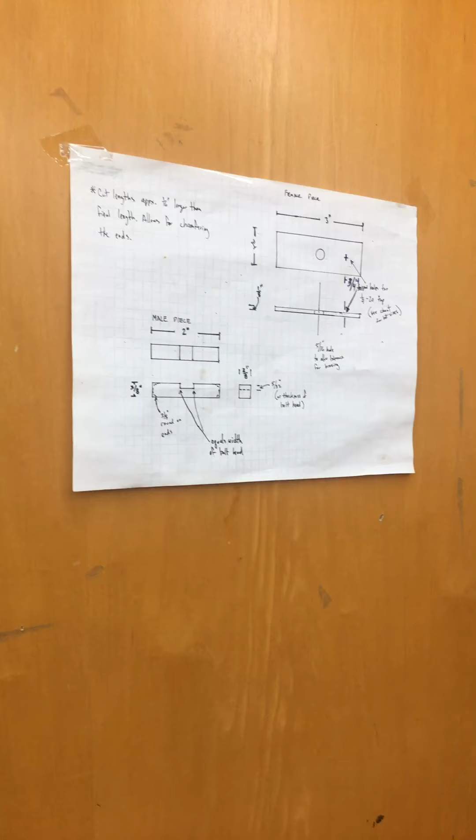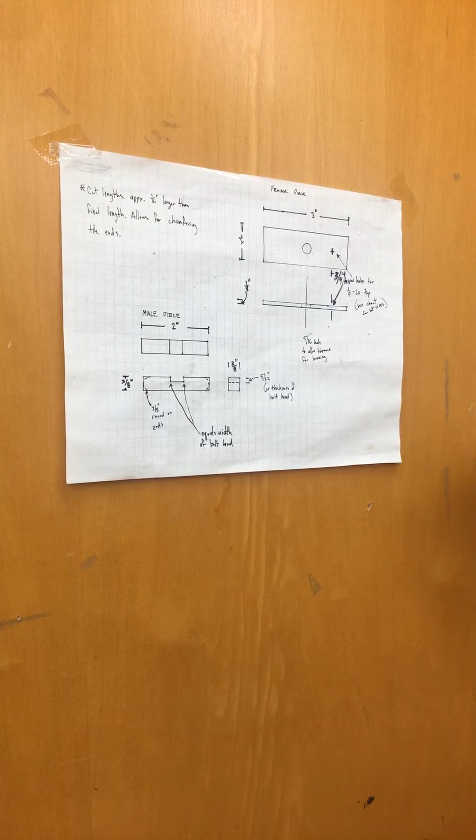So we've talked about the bottom part here, the male piece. We'll have the bolt on it. Now we're going to talk about the female portion here, where we have a piece of stock that's 1/8 of an inch thick. It's 1 inch wide and 3 inches long. Okay. We have a larger hole cut in the center, a 5/16 hole. It allows us to be able to braze a nut on top of that and have plenty of large hole down below that. If we're not perfectly lined up, it's still going to suit what we need to do.

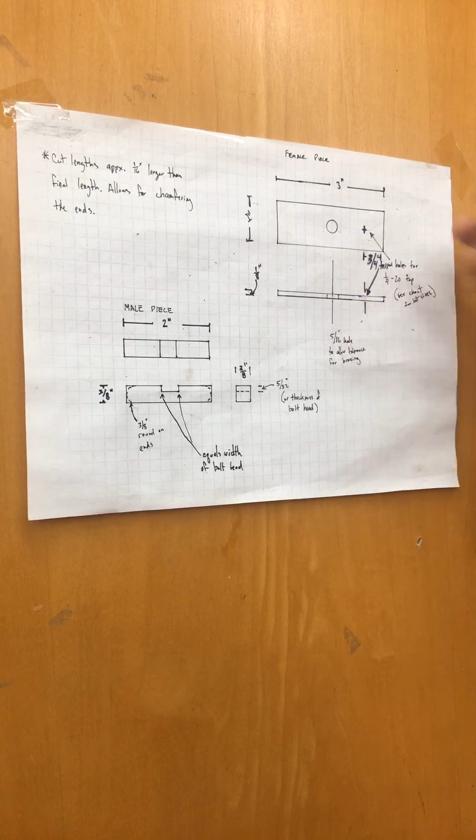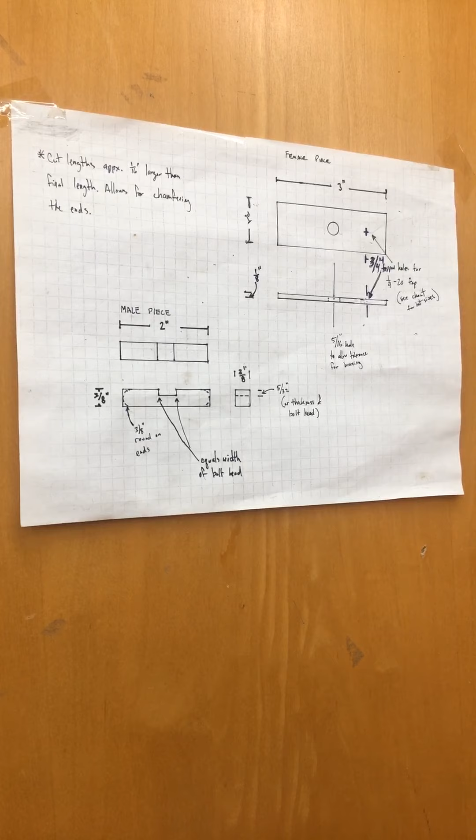And on the side here, we're going to have an additional hole that's tapped to that 1/4-20 threading. So we'll have two places where the set screw can go into, illustrating that we could do it straight into a 1/8 inch piece where we only have 1/8 worth of threading, or onto a 1/4-20 nut, which gives us a little bit more depth in the threading that we have there, and a little bit more stability and strength in the hold.

So I've gone ahead now and I have cut a piece of the 1/8 inch, 1 inch wide stock here from the larger piece. These are back at the same place where the 3/8 by 3/8 square stock was for the last piece that we talked about. I cut this in advance because I've already talked about the hacksaw with you, so it's not something that we can bring up at this point.

I do want you to go back and deburr this again with the belt sander. Remember, we're always keeping it flat on the belt sander, so it's sitting on the table flat and not tilting up at an angle in either direction. If it's up, a corner could actually cut the belt that's on the sander there, which would make some of that belt fly off and perhaps hit you. So we do it on the side, sitting on the table, on the edges to get those burrs off.

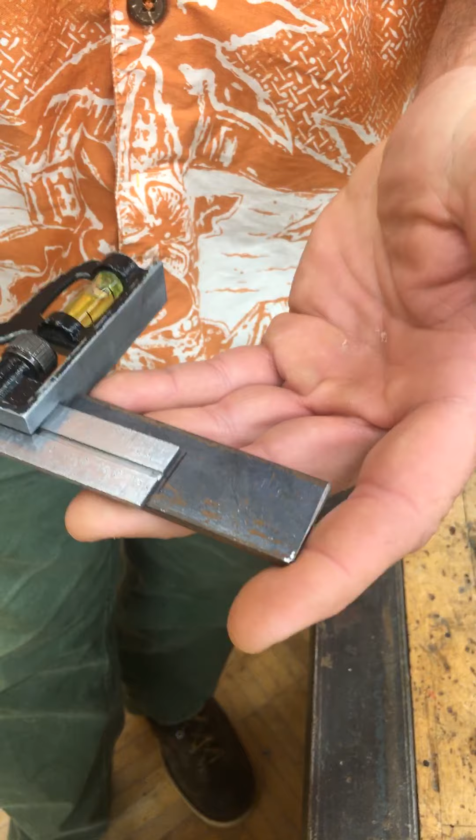All right. So I want to lay out where these holes are going to go. So the first one I'm going to lay out is going to be that center hole there, which is going to be done with a 5/16 bit. So laying this out looks like this. We have a 3 inch long piece. So I'm going to set my scale. So I'm covering up my 1 1/2. And then I want to see if I am at the center here. So I'm going to hold that scale up to it. And with my Sharpie, I'm going to mark across like that. And I'll come the other direction and do the exact same line. And since by coming in from both directions, I'm on the same line there, that means that that's dead center.

Now it's 1 inch this way. So half of 1 inch is a 1/2 inch. So instead of being at 1 1/2 now, I'm going to set it so I'm just covering up that 1/2 inch mark. Then I'll come from this side, draw a line, come from this side, and draw a line. So what we have are crosshairs that identify dead center on this piece of material.

Okay. So a little bit different than working with wood and drilling with wood. We want to have some kind of a center punch there, something that's going to give us a little indentation so that our bit is going to stay centered on that piece and drill where we want it to be. So in the cabinet here, I have on the left side here 4 center punches. They are different than this. This is a nail set. This is not what we're going to be using in metal shop class.

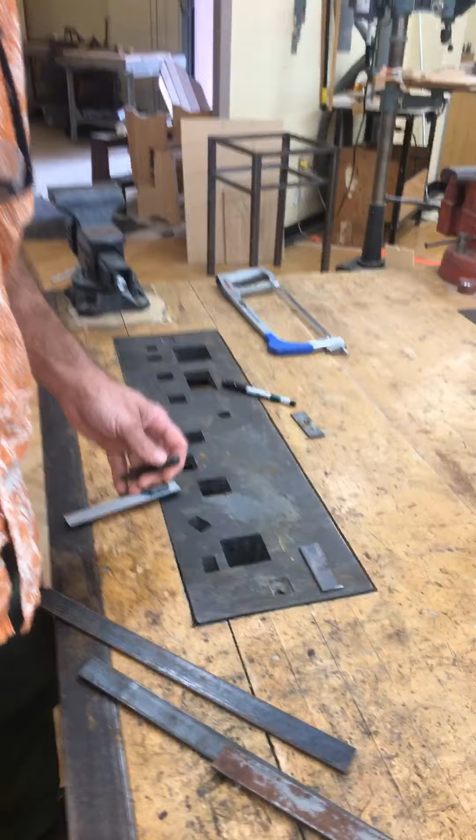These over here, the center punches, have the point on them, and that is going to be used with a hammer. We're going to go right to that center point there and make a small indentation. So I'm going to line that up with my center point there and give it a tap. So what you see is just a little indentation there where those crosshairs were, and that's going to allow my drill bit to sit nicely in there.

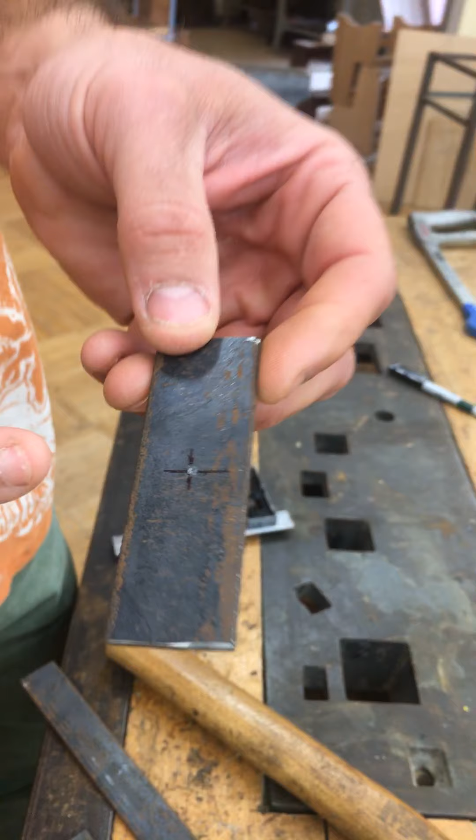One thing that I also want to say, that when you do cut your 3 inches, you have the option of having it in here like this, and you have the option of having it in here like this. Either one's fine. For me, it's easier to cut a square line 90 degrees from the edge that's like this, because I can see the whole angle there. Sometimes when you have it like this, your saw is going to veer off and give you an angle there, which you'll have to go back and correct in the belt sander.

So I would hold it like this, and I would also make it so that the line I'm cutting is very close to the jaws of the vise. If I bring it out here and I try to cut right here, I have so much extended out past the jaws of the vise here that it will have some vibration there. It'll make it more difficult for me to cut.

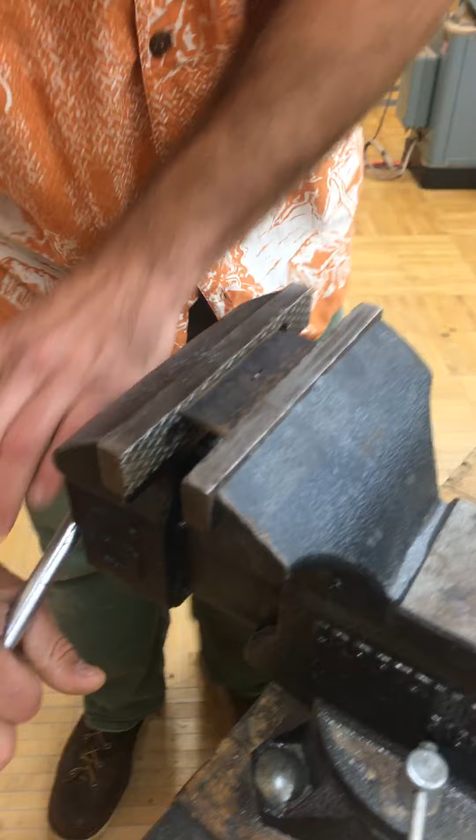Okay. So now that I'm going to be drilling this hole, I'm going to set this in here. I'm going to clamp it. Ultimately, I'm going to have a 5/16 hole going through this. With metalworking, we center punch, and we also start off with a bit that's much smaller. So I'm going to do 5/16 with 3 different bits.